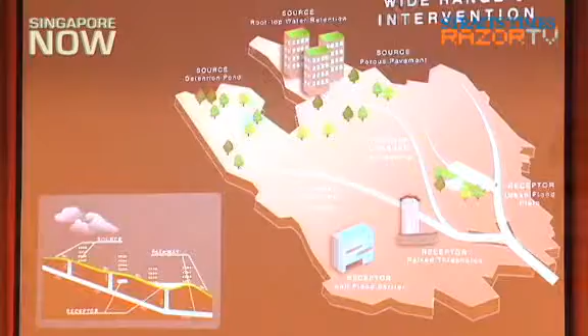So what might some of the options to flood mitigation look like? In arriving at this, the panel looked around the world at current best practice and in particular some of the latest developments. And in doing this, it's looked at three areas of potential improvement. Firstly, amongst the areas from which the floodwater is actually generated in the first place. This we call the source of the flooding at the upper ends of our drainage areas.

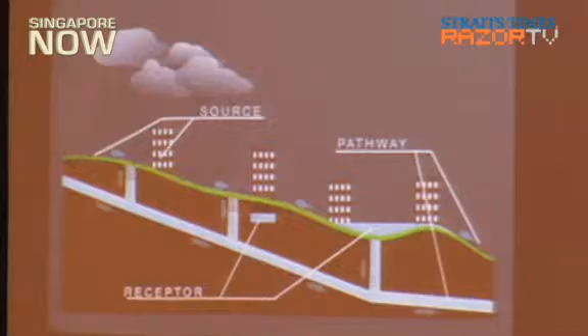Secondly, along the pathways, that's the drainage conduits and paths over which the floodwater travels. And thirdly, the receptors. The receptors are those parts of our areas that impact from flooding. This could be property, transport links and other infrastructure. And we believe that a range of interventions should be delivered in all of those three areas. And I'd like to just give you some examples of what those might look like in the future.

You'll bear with me while I move the mouse around. Okay.

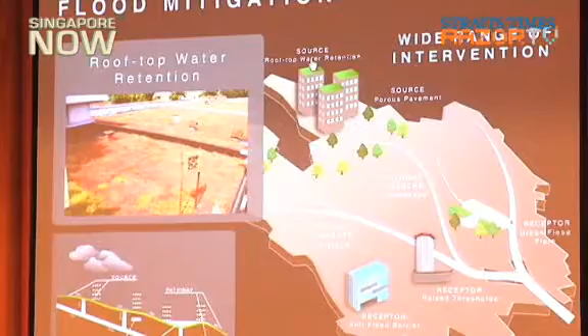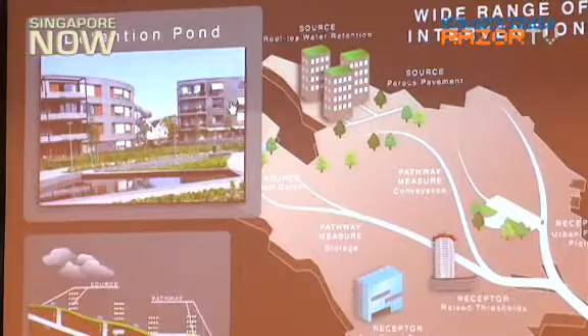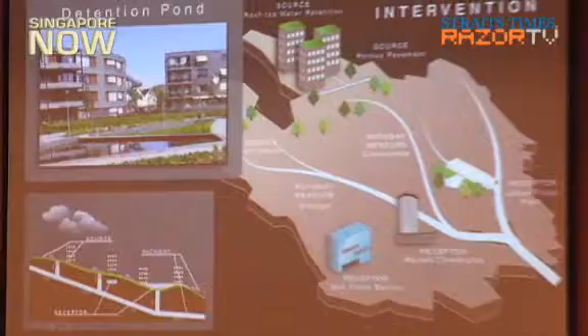Firstly, we believe there's great opportunity in Singapore for retaining the rainwater where it falls within individual building developments, either on the roofs of buildings or in storage tanks and ponds at ground level. And we would like to see regulations brought into Singapore which would require all new developments to install source control measures so that the impact of development is mitigated. We also believe there's potential for retrofitting these measures to existing buildings and development.

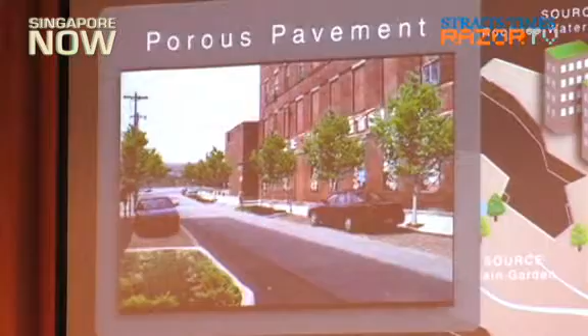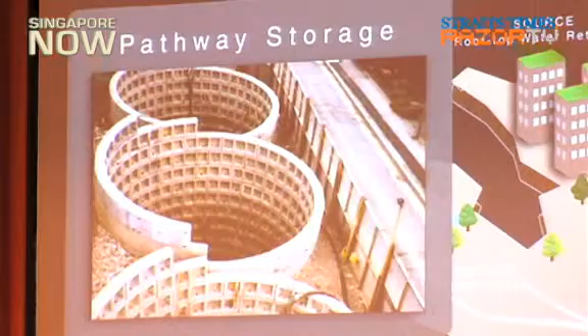We also believe similar measures can be implemented along the roads and pathways of Singapore, particularly during new highway development. And this shows an example of a porous roadway from the USA. We believe that a great deal of the impact of conveying flood flows can be mitigated by putting more storage into our drainage systems. So installing storage tanks and storage ponds along the pathways of our drainage systems could help to reduce peak flows and remove flood risk.

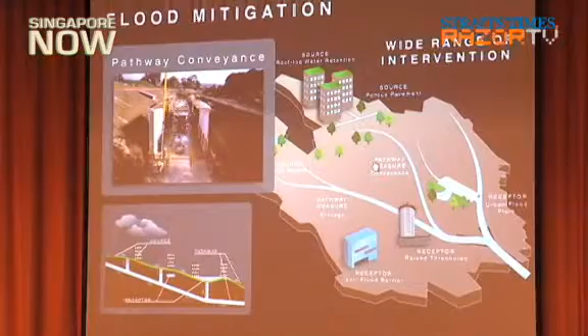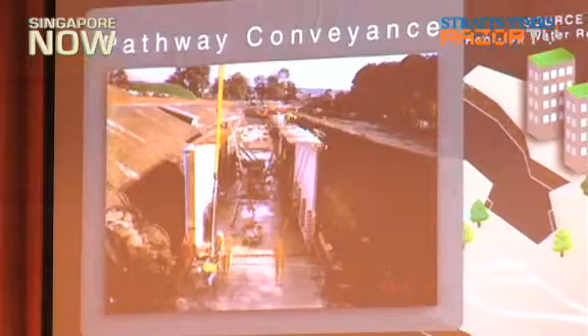We also believe that there is a role for upgrading the conveyance capacity of some of our drainage conduits, but we do not see a wholesale upgrading of the capacity of the drainage infrastructure as being the best way forward. This will be expensive, but more importantly, it will be extremely difficult and disruptive to deliver within the dense urban area of Singapore. And we believe there are better methods for Singapore than that.

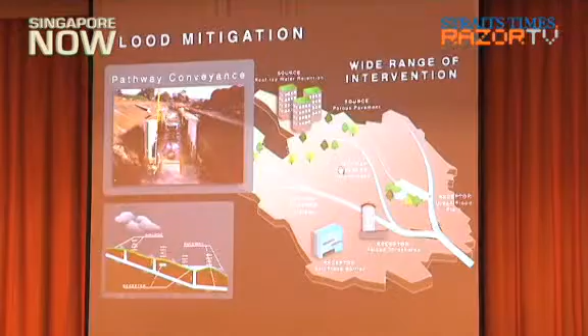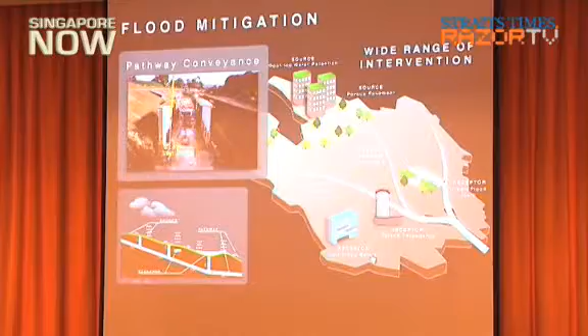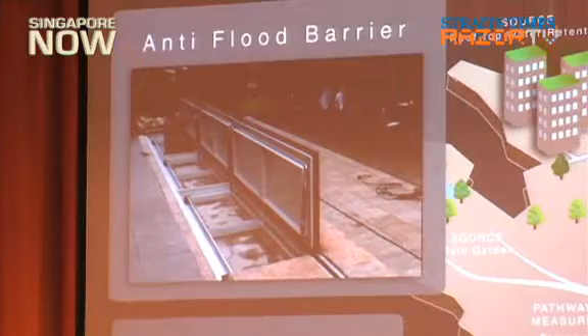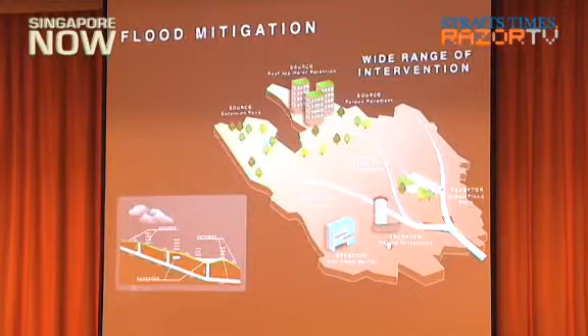And finally, within the areas that might be at risk from flooding themselves, we believe there are measures which are already being implemented and could be carried further. So the use of anti-flood barriers in areas that already exist, and we have some excellent examples of this already in Singapore. The use of raised thresholds, which again is part of some excellent current design standards in Singapore.

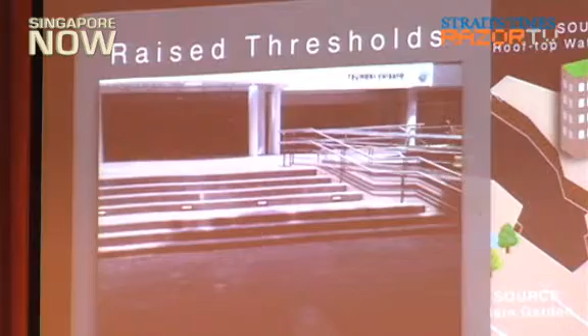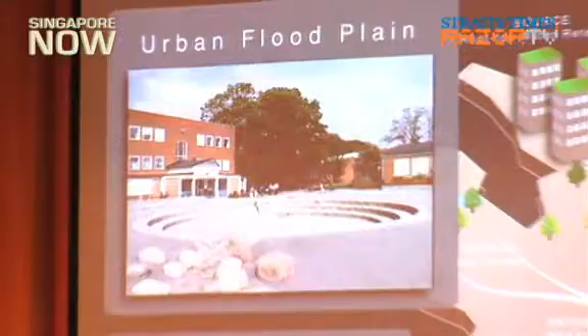And just as important, the identification of safe areas in which floodwater can accumulate during extreme events. And this shows an example from Scandinavia where a recreation area outside a school is used as a temporary flood storage area during flooding and extreme events. And by using the appropriate mix of measures at source, pathway and receptor, we believe we can better tackle flood risk in Singapore.

But there are also other things which we'd like to see. We'd like to see better public engagement. We see the public and other stakeholders, businesses and commerce, as also playing an important role in helping to manage the damaging effects of flooding in this urban area. And as part of that improved engagement, we believe there's an opportunity through improved modelling and monitoring of weather patterns to generate better flood forecasting and provide better information to the community as a whole. And we see that as a very important step forward, as well as providing better physical infrastructure.

And finally, we've alluded to some of the future challenges which Singapore will face. Singapore, like most major cities in the world, will have to cope with some of the mega global trends that will occur. Rising energy costs, climate change, extreme storms, extreme droughts, water scarcity and resource scarcity. And what we must not do is to set a pathway of introducing flood risk management measures which compromises our ability to respond to those future long-term challenges in Singapore.